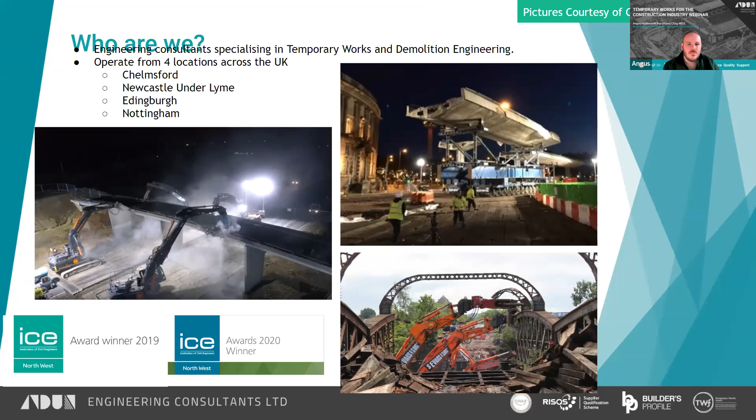So let's actually get into the presentation itself. So why are rail temporary works different? What's so special about them? Well, the answer to that is, if you get things wrong, not only do you affect your construction site, but you have the very real opportunity to kill or injure a lot of people who happen to be going about their daily life using public transport, in this case, the railways.

So as far as I'm aware, I don't think there's ever been a temporary works failure that has actually caused a train carrying passengers to derail that has led to injury or serious injury or death, though there's been a couple of close calls over the years. Going back, I don't know, when Gerrards Cross was probably early 2000s. I can't remember.

They wanted to build a new Tesco store above the railway just outside Gerrards Cross station. And they did it out of precast segments, which you can see here. So that's one segment. Hopefully you can see. Can you see my mouse moving right? Or do I need to just draw on the screen?

It was 2005, Angus. 2005, there you go. So there's one segment that way, the other one that way. So they sat on foundations over here and here. And then they were dropped into place. And then there was supposed to be a very careful backfill methodology used to ensure that there was a balanced load on either side of the arch.

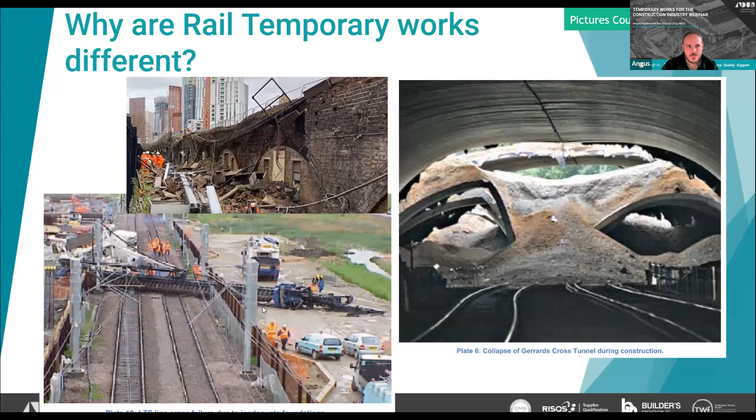So the other aspect to consider with the railway is quite a lot of our rail network is electrified, and there's plans for quite a lot more of the rail network to be electrified. You have two key types. You have your OLE, overhead line equipment there, which the conductor picks up off. Obviously that's running at high voltage, so you've got quite large interface zones you need to be aware of and stay well outside. So the key one being the 2.7 exclusion zone around the conductor itself.

Then you have your EMC interference and compatibility zones. That's more of interest when it comes to building near it or putting a house near it or some sort of development nearby. You need to make sure you're outside the EMC zone.

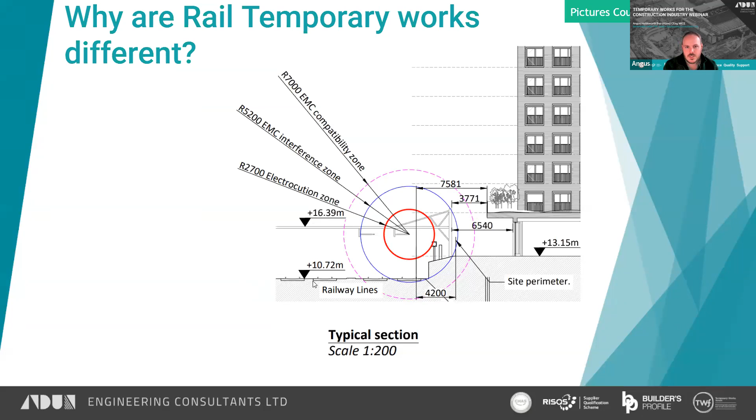Down in generally the south of the country, south of London, we also have the lines that are third rail electrified. That's literally just a rail that sits here, or it could be this side actually, it can be either side of the track, and the trains have a shoe on them that picks up current from there. Now, probably not quite such an issue to work around because it's quite well understood where that is, but the OLE is a much higher hazard for the sort of works we're doing, I would suggest, than the third rail. Unless, of course, you're working on the track, in which case you've got to protect the conductors.

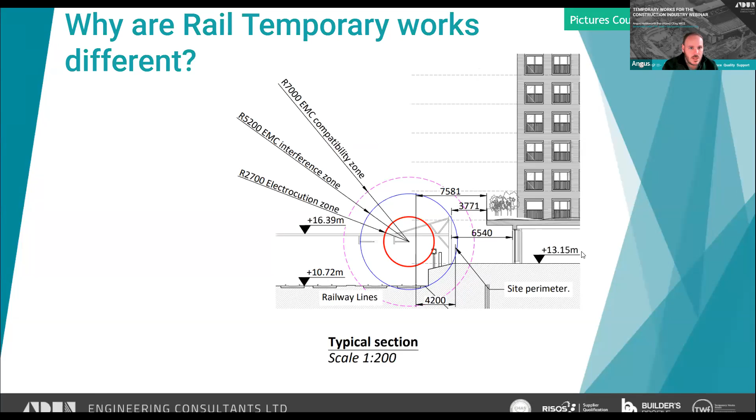So Network Rail defines what they mean by temporary works. There's lots of different definitions in the industry of temporary works, but this is what Network Rail use. An engineered solution that is used to support or protect either an existing structure or the permanent works during construction, or to support an item of plant or equipment or the vertical sides or side slopes of an excavation during construction operations on site, or to provide access.

It is used to control stability, strength, deflection, fatigue, geotechnical effect, and hydraulic effects within defined limits. They then go on to talk about a number of specific items, but I'm not going to read all of that out. You're quite welcome to read it or get yourself Civ 003 and read it yourself.

So one big change within the industry since the last time I did this presentation is that Network Rail have now made their standards freely accessible to people who need them. So if you search for Network Rail standards, it will take you to a Network Rail page, which will tell you how to gain access to the standards. Effectively, you register, they check your credentials that you are actually working on the railway or you need access to these standards. And if so, you get access and you get all of your standards for free, which to my mind makes an awful lot of sense.

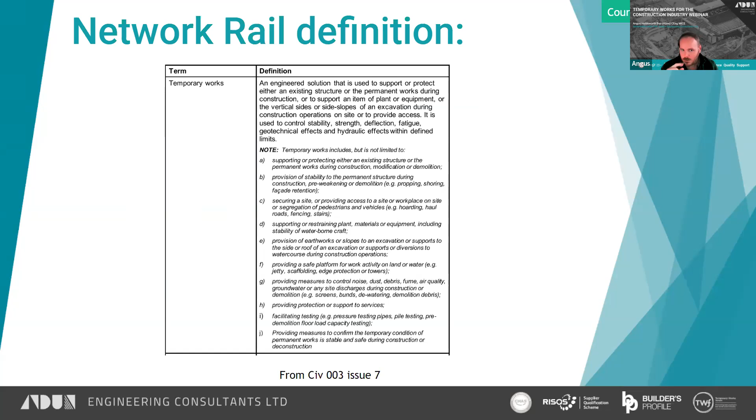These Network Rail documents, it made no sense to me that we had to pay to access them to do work for Network Rail infrastructure. It makes far more sense that they're free issued and we don't just add on the charge of accessing the standards to Network Rail every year. So it makes perfect sense to me to do it this way. And it means there's no excuse. If you need the latest standard, you can go and look for the latest standard, access it yourself, and away you go. So anybody here who's working in the rail environment wants to go and read where this all comes from, there you go, Civ 003 issue 7 is the latest version.

So within Civ 003, there is a process flow which clearly explains temporary works, well, permanent and temporary works actually, but we're talking today about temporary works. They've changed from the GRIP stages at the top, though GRIP stage is still broadly aligned with these. I'll show what GRIP means in a minute, but it used to be tied back to the GRIP stages of the projects, but they've changed. I think they're now using, is it PACE system? I can't remember off the top of my head.

So right from the very start, temporary works should be considered. It's quite clear here. So at the very, very earliest stage where you're working out, right, we want to replace this bridge, or we want to build this new platform, whatever the project might be, you're supposed to start considering temporary works. In fact, the permanent works designer has to specifically cover their conceptual idea for construction and temporary works within the Form A, which is the approval in principle process.

So it should be being considered right from the front of the project, which is excellent, as long as they get the right people involved at an early stage to consider the temporary works and to actually plan how best to deliver them. I've whinged about this many times before, but if you get people in who know temporary works, then you get a better output at the end than if you get a permanent works engineer to come up with the temporary works.

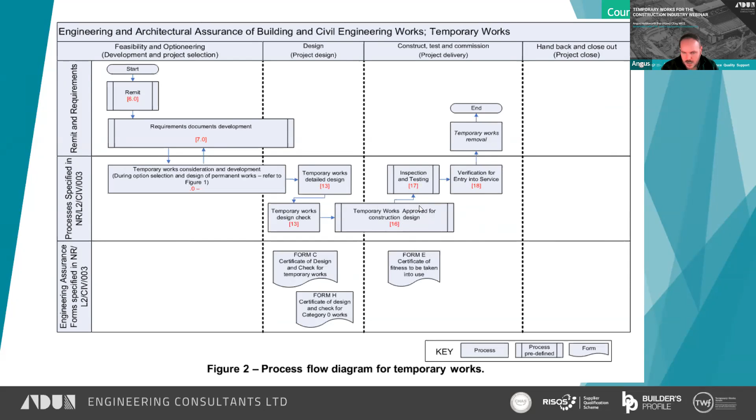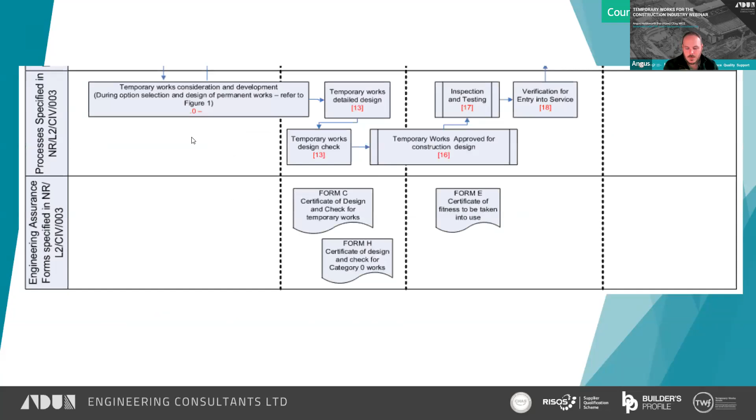Certificate of fitness to be taken into use, which will have to be filled in, but that's a construction stage thing rather than a design stage output. So just going into a bit more detail there, which I've talked through in the other slide. So the GRIP stage is what we used to be using, which was output definition, feasibility, option selection, single option development, detailed design, construction, test and commission. These GRIP stages still kind of go hand in hand with these stages here. It's just they've tweaked the naming of them, but the GRIP stages are still referred to within Civ 003.

Last time we did this presentation, we would have been talking about Form 1 to 6. They no longer exist. So we're now going back to Form A to H. Form A being the first form that's put in, which is the approval in principle, explaining what the project is and how it's going to be done, the design standards you're going to use. Every project for Network Rail will have a Form A because it sets down what the project is and how it's going to be designed and delivered. And as I said, temporary works should specifically be mentioned within it.

Form B is the certificate of design and check for permanent works. Form C, certificate of design and check for temporary works of category 2 and above. Form D, I'm not really sure, I've never been involved with one. Form E is bringing something into use. Form F, Roads Highways Authority, again, I've not really got much experience of that. And then Form G is for Cat 1 work, and Form H is Cat 0 temporary works. So these have all been simplified, and whereas before for a temporary works design you've had a Form 2 and a Form 3, it's now all in one document, which is your Form C, which is only a good thing in my mind.

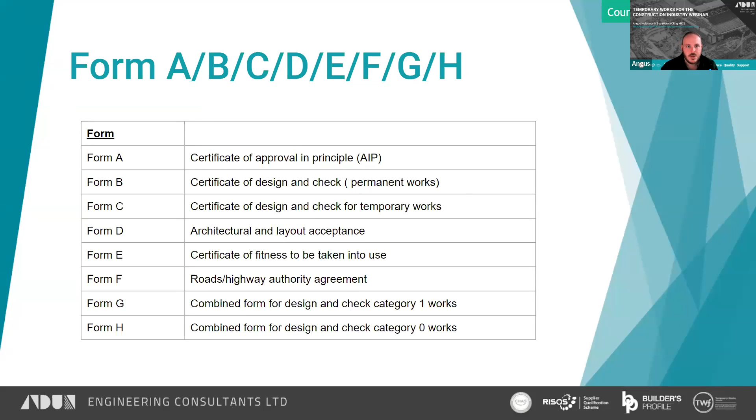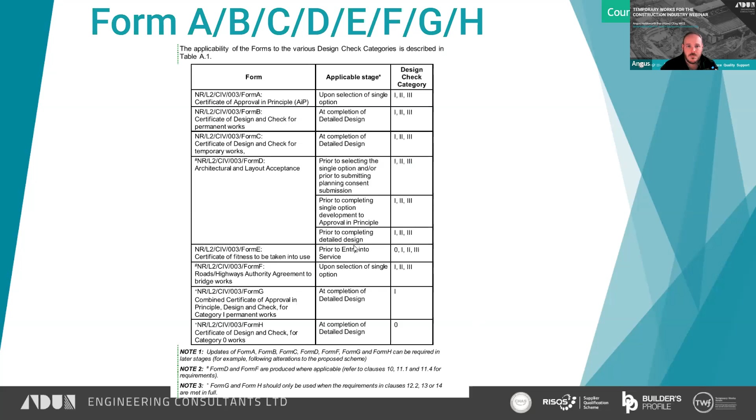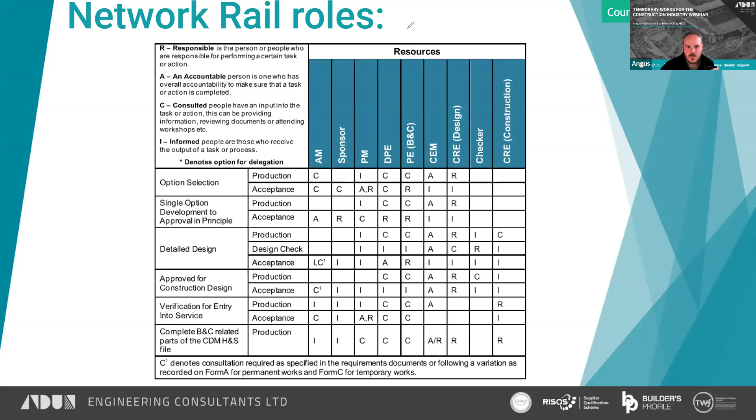And then this is just, again, the Network Rail definition of each of those, showing the design check categories that are covered, which is basically what I've just talked through there. Again, straight out of Civ 003. So within Civ 003, there's a number of what they call resources. There's people involved, and it clearly sets out who is responsible, accountable, consulted and informed at each stage of the process. So this is for detailed design, which is where we're most going to be looking, which is where you're going to be having your temporary works design.

The key people being your CEM, your CRE, the checker, and the project engineer now actually as well. So CEM is contractor's engineering manager. They are the ultimate overseeing person for the scheme. A lot of responsibility being a CEM, often engineering manager type level. They are accountable for most engineering outputs on the scheme.

The DPE is a Network Rail role, designated project engineer. So the CEM is normally for the contracting organisation, generally speaking, and looks after all the deliverables and is responsible for making sure that everything is properly coordinated. So making sure the IDCs are undertaken, which is your interdisciplinary checks.

CREs, there'll normally be a CRE design for each, what's the word, I can't think of the word I want. Each discipline. So you'll probably have one for the OLE, one for temporary works, one for geotechnical, one for permanent works. It all depends on the complexity of the project. You can even have them for demolition. It all depends on how the CEM and the project team want to set it up. But the CRE design is responsible for making sure that the detailed design is completed.

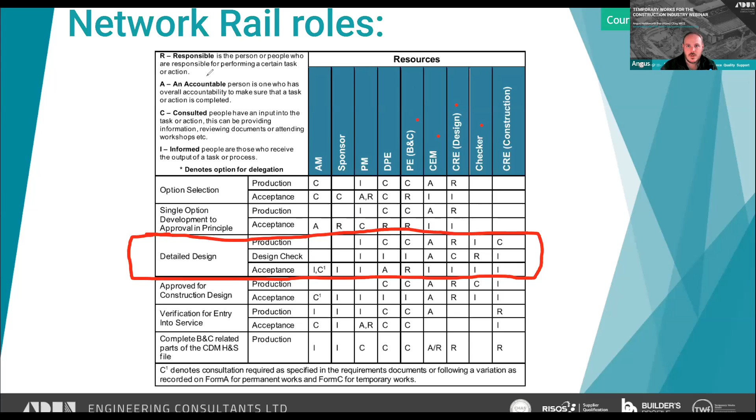The checker is obviously responsible for making sure the design check is undertaken. CEM is accountable. They make sure the action is completed, so they've got to make sure it's done. The CRE is responsible for performing that task. Okay, and then the project engineer has to accept, i.e. is responsible for accepting that task. I don't know if you can see that, just clear those sketches. So at the top there, the R, the A, the C, and the I, and what that means. And then the DPE is consulted and, for acceptance, is accountable as well.

All very clearly set out. So you should be under no illusions as to what your role entails. And each of these roles is set down within the Network Rail documentation. I can't remember off the top of my head, I meant to drop in here the correct standard that refers to defining each of these roles. Suffice to say that it has also become a much more in-depth process than it used to be to get approved as a CEM or a CRE or a checker. You have to do a lot more work now to demonstrate that you are competent and that you can undertake that role. It's quite an in-depth process now.

A lot more so than when I was talking about this 2 years ago, and it was really just fill in your FO39 or 40, send your CV. Now you've got to do that and your quals and all the other bits and pieces to demonstrate your competence and how you've actually achieved the criteria set down for each of those roles.

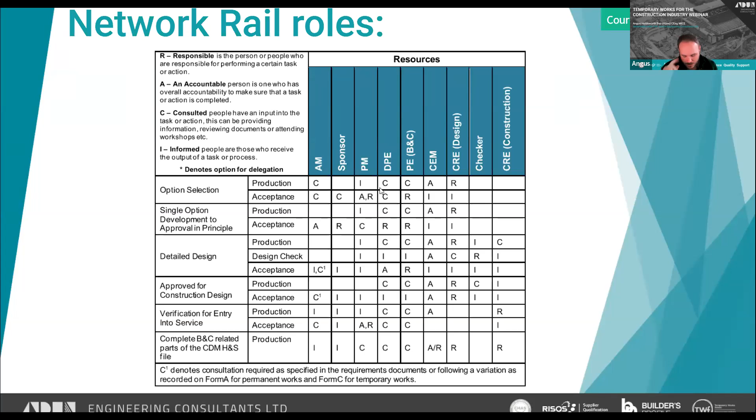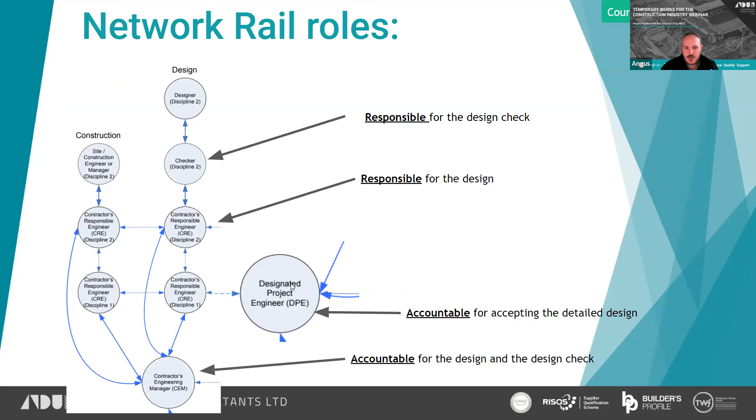So to put that another way to make this a little bit easier to follow, I found it easier to look at it in a flowchart kind of role. So this is how that sits. So for the design, you've got a designer and your checker, and then the CRE is responsible for making sure that this overall design is correct. The DPE is accountable for accepting it, and the CEM is accountable for the design and the design check. I think I've missed one off there, haven't I? Because I haven't got the project engineer on there. I need to revisit that. Let's skip that one.

Another key item which is now being made a defined requirement is the interdisciplinary check. So that means if you design a piece of temporary works, you've got to do your IDC, which is where all the other disciplines are brought together. You run through the scheme and make sure that your design hasn't or isn't going to affect another discipline's design. So that could be OLE, signal sighting, the gauging team, security, or interface with the public in some way.

But the idea being that you get everybody in the room, or more likely via Teams or similar, to go through a scheme, and you formally record the output of that assessment. That could include effectively a DRN, a design review notice, which identifies any changes that need to be made. Those changes are then made before the scheme is finalised. But that is now a defined requirement within the Form C and the Form B to make sure that that is done, whereas before it wasn't so bluntly put, it wasn't a requirement, where it's now specifically required on the form.

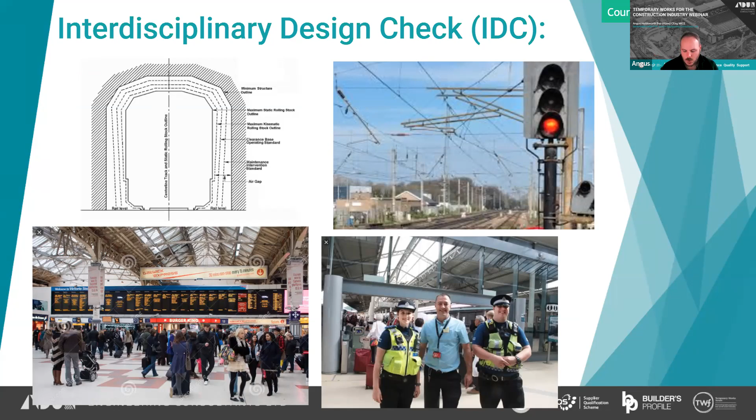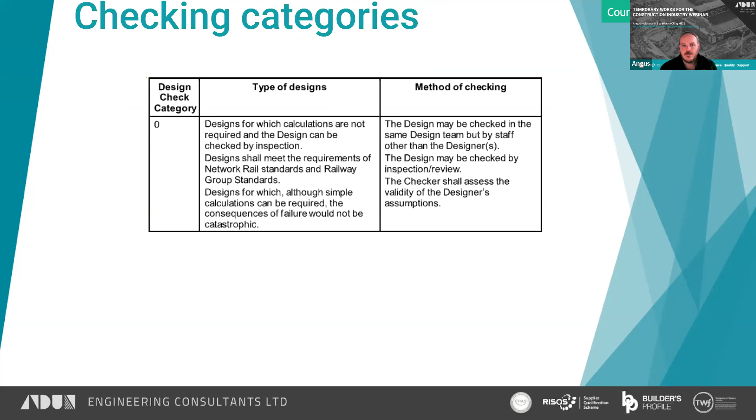So checking categories. If you've watched these webinars before, we've covered these many times. There's Cat 0 to Cat 3, starting with 0, which is the most basic design and check package. It's normally for something very, very low hazard. So something like an excavation 1.2 meters deep. Cat 1, slightly more in depth.

Cat 2 is where you take another step up in complexity. I'm going to show examples of this shortly, so I'm not going to go into too much detail here. The key change with Cat 2 compared to Cat 0 and Cat 1 is that the person checking the design doesn't get to see the original design calcs, and it can't be someone in the same team. So it can be the same organization, but not within the same team.

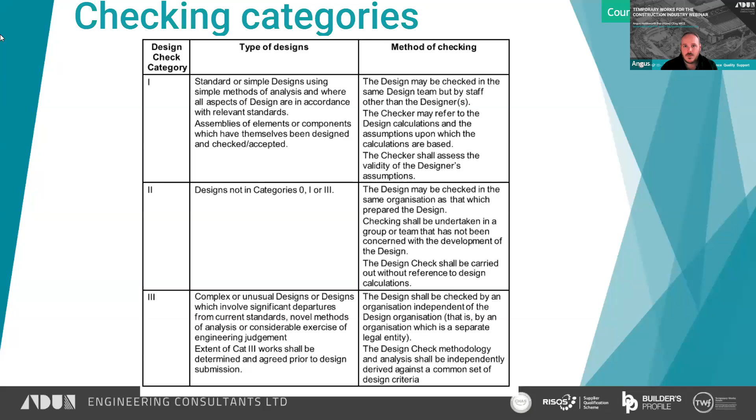So as a business, we do it by having a different office undertake the Cat 2 to the one that's done the design. But it's whatever system you put in place to show that a Cat 2 check is being undertaken properly. The key thing is this point here, which I've said a number of times: the number of companies I know that still consider that a Cat 2 can be done by looking at the calculations is unbelievable. It says there in black and white, it says in BS 5975 in black and white, you can't look at the calculations. It's as simple as that.

Similarly, Cat 3, similar idea, except it goes to another organization. The definition Network Rail uses is a separate legal entity, which, as I understand it, means an entirely separate business, not a part of the business. So if you run with one set of PI cover and you have 3 different businesses with similar or slightly different names, that is not a separate legal entity because it goes back to the original PI cover. If, however, it's a business and a second business that's completely standalone, with separate PI cover, that is what they mean by separate legal entity.

The other point with the Cat 3 is the design check methodology and analysis shall be independently derived against the common set of design criteria. So that means that if I was doing a design, I would provide the checker with my design output, being the drawings, and my design methodology. The checker then has to go away and work out their own methodology. And again, Network Rail would prefer that different software is used, a completely different approach is used, to demonstrate from a separate engineer's point of view that the design works.

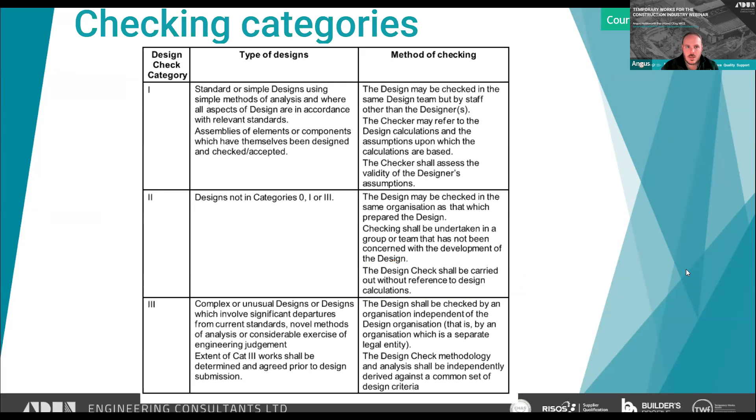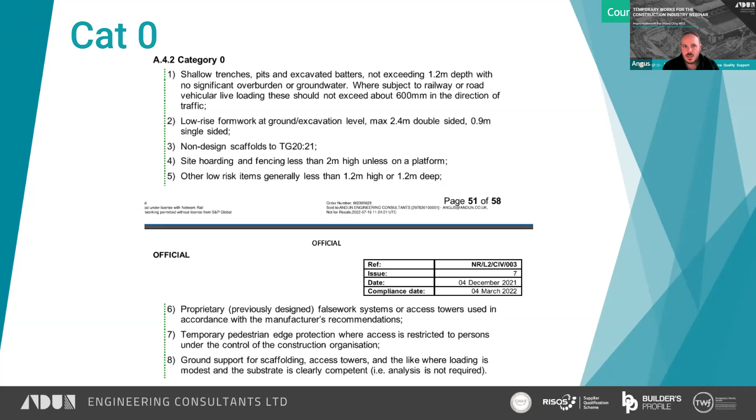So if we run through some examples now, Cat 0 being the lowest grade. So you've got hoardings that aren't used on the railway, scaffolds to TG20, which means a standard scaffold effectively, ground support for scaffolding or access towers, shallow trenches not exceeding 1.2 meters deep, these sorts of things. So fairly simple run-of-the-mill items. An example there, less than 1.2 meters deep. I mean, that trench box is more than 1.2, but I couldn't find an image of a trench box 1.2 meters deep, to be honest.

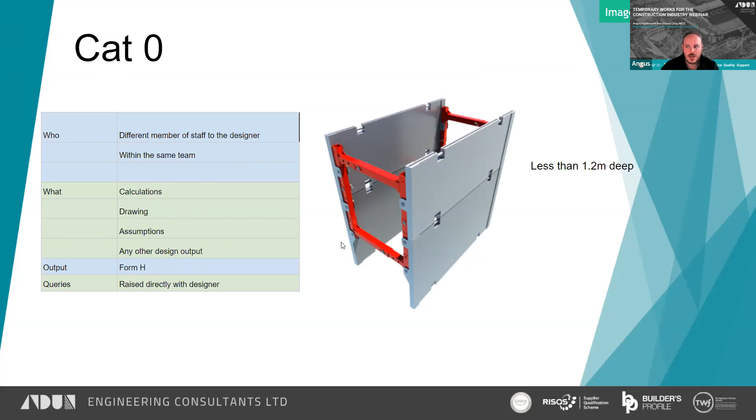So who can do it? A different member of staff to the designer within the same team, and they can look at the calcs, drawings, and any other design output, no problem at all. And the output for Network Rail would be Form H along with the drawings, and they probably want the calc package. If you've got any queries, you can just bring them straight up with the designer. Simple as that. Oh yeah, the trench boxes are available.

Cat 1. Simple excavations using CIRIA 97 trenching practice. Design scaffold to TG20. I'm just pulling out some individual items here. Hoardings greater than 2 meters high, concrete pump outriggers. Hoardings on a platform below 2 meters high. Generally, rail hoardings are 1.8 and on a platform, so that makes sense to me. A Cat 1 check there.

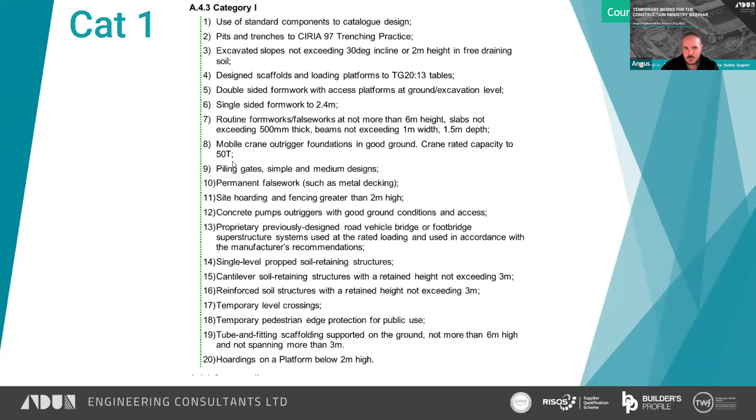Mobile crane outrigger foundations in good ground, cranes rated less than 50 ton. So an example here would be a mobile crane positioned which is less than a 50 ton mobile crane, so an outrigger load around 25 tons. I'm not going to read all of these out, but again, the output is a Form G for a Cat 1 check or a Cat 1 risk category. And the checker can look at the calculations, the drawings, and go through and make sure that they're happy with the approach.

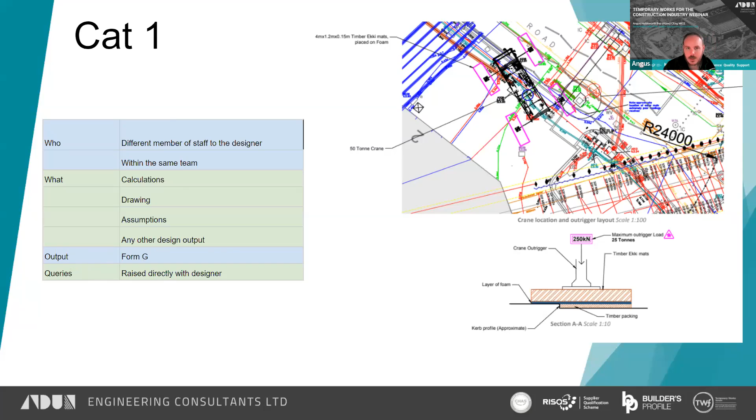Hoardings, again, this is an interesting one because I've never ever been able to put a hoarding up on a platform that has been Cat 1 checked. They've always had to be a minimum of Cat 2 and in some cases Cat 3, but the standard now says Cat 1, though it is at the discretion of the DPE, which is what CIV 003 says. But interesting that this is now classed as a Cat 1 design.

Cat 2, where we start getting into the slightly more complex: excavation frames, cofferdams, sheet piled walls, contiguous piled temporary walls, design lifting equipment, barge mounted equipment, tower crane bases unless of complex design. I'm not sure what would define complex design, whether that means a piled base becomes a Cat 3 or whether they mean a grillage. I'm not sure what is defined there.

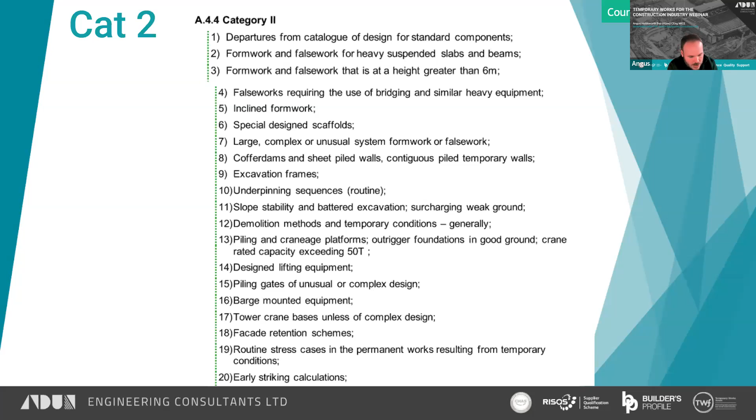Routine stress cases in the permanent works resulting from temporary conditions come under Cat 2, which is interesting as well. Again, I've never got away with a Cat 2 check where we've changed the loading on a permanent work structure. Conventional tower crane base gets a mention again there, which is interesting. Reinforced soil structures not exceeding 6 meters high. Temporary platforms at Cat 2. Road vehicle bridges and footbridges.

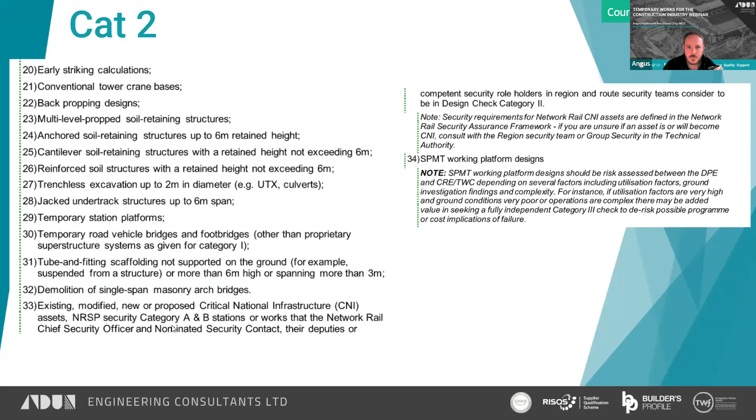Demolition of a single span masonry arch bridge falls under Cat 2 as well. So as an example there, that would fall under a Cat 2 check. Though again, there's many occasions where we've had to do Cat 3 checks of masonry arch bridges. Again, it's down to the DPE to decide. If they decide it warrants a higher level of check, then they're within their rights to ask for a higher level of check. Cat 2, the output is a Form C, a design check statement, and a DRN notice.

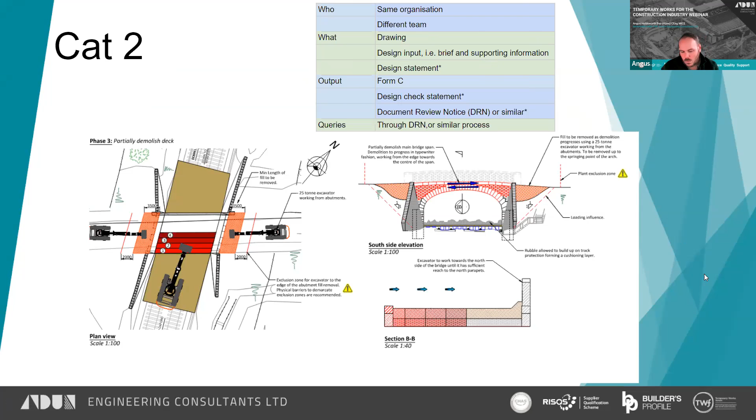So if the Cat 2 checker identifies any issues, they should be flagging those up formally to the designer to make sure that they're tracked and adjusted or addressed before the design is finalized. And again, the checker cannot look at the calculations. There's no possible way that a Cat 2 or Cat 3 checker should be seeing the calculations. It just shouldn't be happening anymore.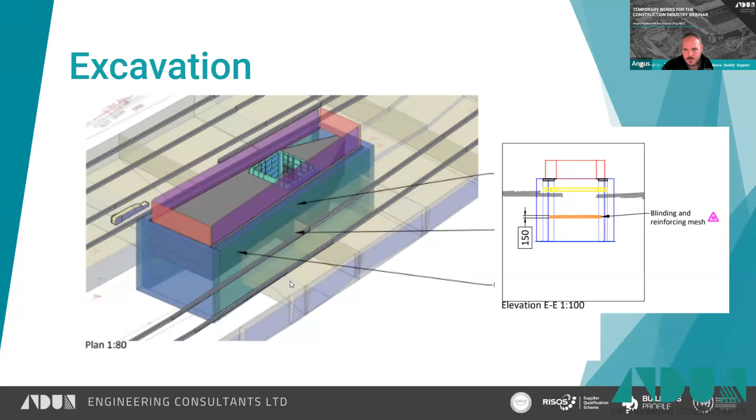So that's something you really need to consider, particularly when you're doing temporary works in close proximity to the railway. The gauging envelope is a very important thing. There are ways and means that you can get the gauge envelope reduced, but it's quite a specialist and drawn out process to actually have it gauged for the stock that uses the line. This is the general gauge profile that is used for clearances across the network. But there are certain areas where they have a reduced gauge anyway, but it's not a simple process. It's not one we've ever gone down. It's easier if you stay outside this gauge envelope and then everyone's happy.

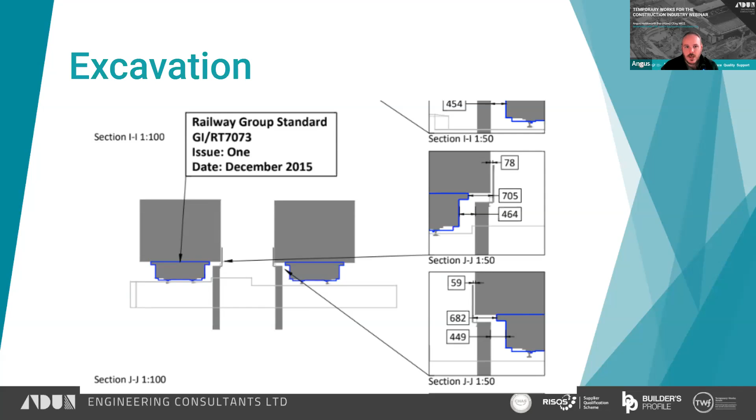Cat 3, so the highest hazard or the most complex temporary works you can have, where we get to things like excavations and cofferdams in tidal conditions, demolition of non-masonry bridges. So any non-masonry bridge has to have a Cat 3 check. Demolition of multi-span masonry arch bridges. Again, that all comes back to a few collapses that have occurred with multi-span masonry arch bridges over the years. Partial demolition or modification of existing structures.

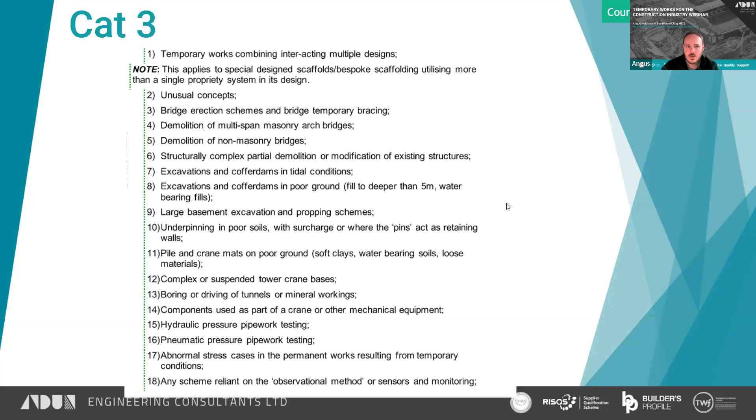Complex or suspended tower crane bases, abnormal stress cases in the permanent works resulting from temporary conditions, any scheme where you're using the observational method or sensors and monitoring to make sure that it's performing as required. Pile mats and crane mats on poor ground, so that means soft clays, water-bearing soils, loose materials, etc. So there's quite an in-depth description of the things that are covered here. Abnormal and highly innovative designs, work on sensitive clays, facade retentions, schemes close to public areas.

And then there's this kind of catch-all of structures that exceed the limits for design check category 2. Any design check category 2 item in an unusual or high-risk situation, innovative or complex designs, projects involving partial demolition, other works that the technical head, AM, or project engineer and the DPE in many cases consider to be in check category 3. So regardless of how you've categorized it, don't be surprised if Network Rail come back and say, hang on a minute, actually we want you to go to a Cat 3 here. It's not unusual at all to be pushed up the ladder.

So these categories and the Form C, G and H process applies to when you're working for Network Rail as the ultimate client, but also where you're doing asset protection jobs. So if you're working on a scheme next to the railway, where the end client isn't necessarily Network Rail, you're probably going to have a BAPA in place, which is a basic asset protection agreement. This sequence and all this methodology still applies to those situations. And you will be held to follow these systems.

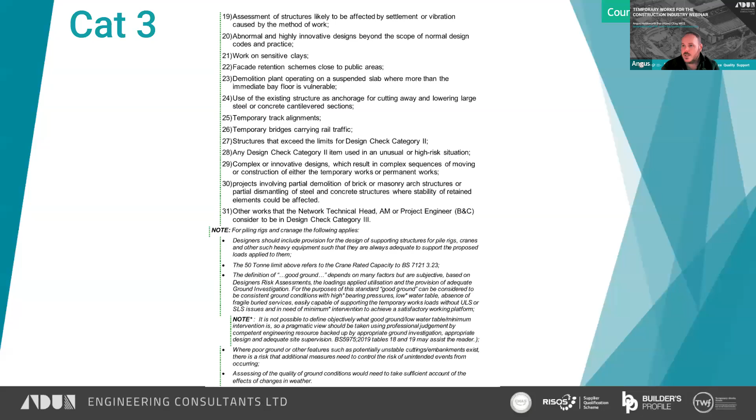So a good example of a Cat 3 would be SAS 13 here. Masonry, multi-span masonry arch bridge being taken down. This again, the output is a Form C design check statement and a DRN notice from the checker to the designer.

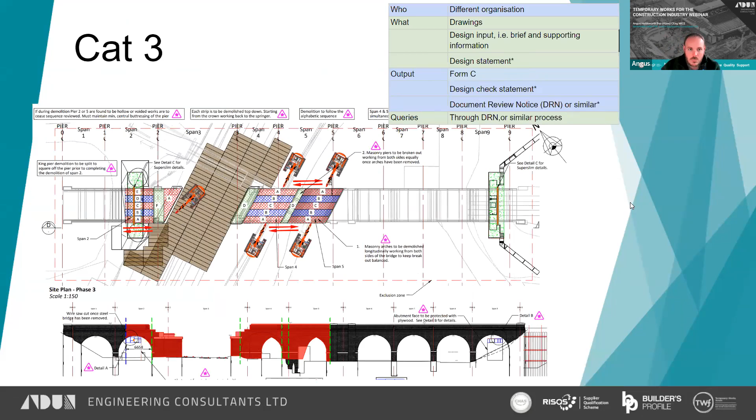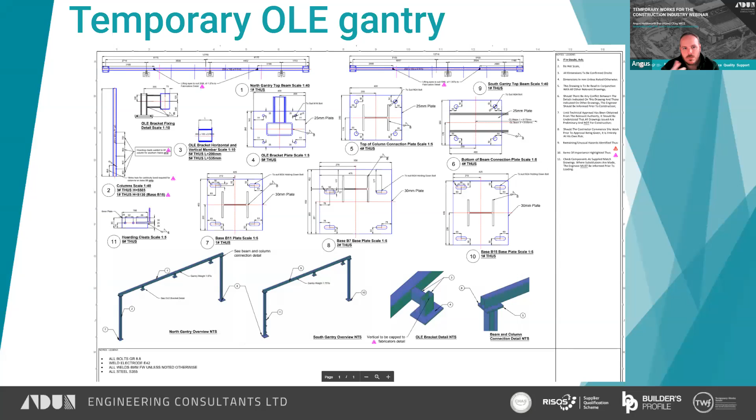This is a good example of a Cat 3 as well. I can't remember the exact reason as to why we ended up doing this, but we designed a temporary OLE gantry for Manor Park Station. I think it might have been because they couldn't get hold of stock components. So we designed a temporary OLE gantry, which was installed. And there it is in all its glory. In fact, it's sitting on the lift base that you can see there. That was what the excavation was for back on the earlier slides.

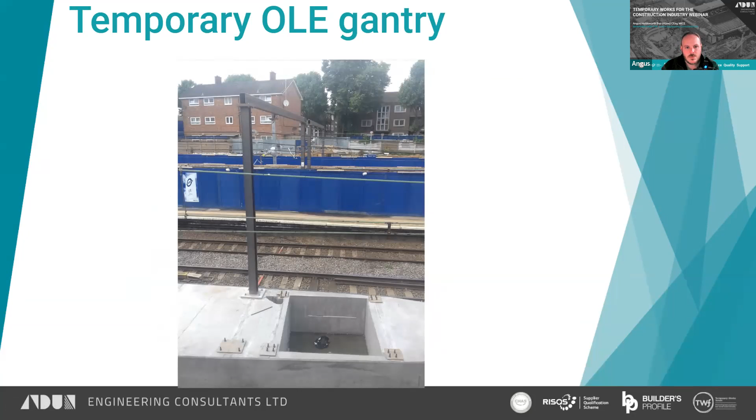So then there's a temporary OLE gantry in place that picked up the OLE. So that was quite an interesting design experience. Not one we've done since, but interesting nonetheless. It only had to last a couple of weeks, I think it was, before the new permanent solution went in place, but it was an interesting one.

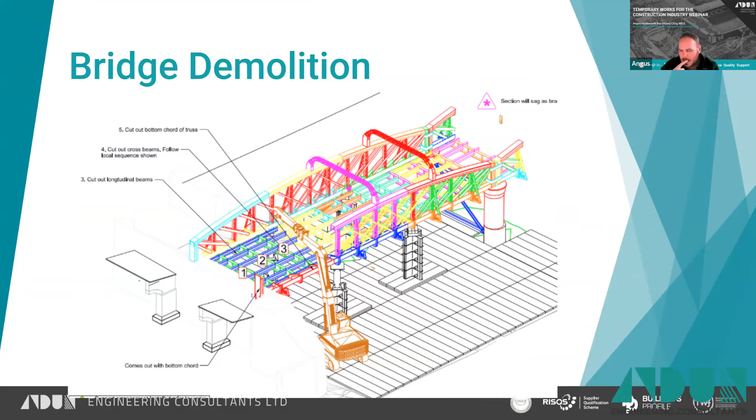So bridge demolition is one that is now fully covered in there. This is an example of where we delivered a demolition scheme within a ProjectWise environment, all in full 3D. Everything, every part of it was done in 3D in the ProjectWise environment. Quite hard work and quite a lot of time to get it done, but done it was. The different colors represent the different components of when they come out. Again, we had to get agreement for using the colors in the drawing, but it made it a lot clearer when you were following the demolition sequence to understand what came out when.

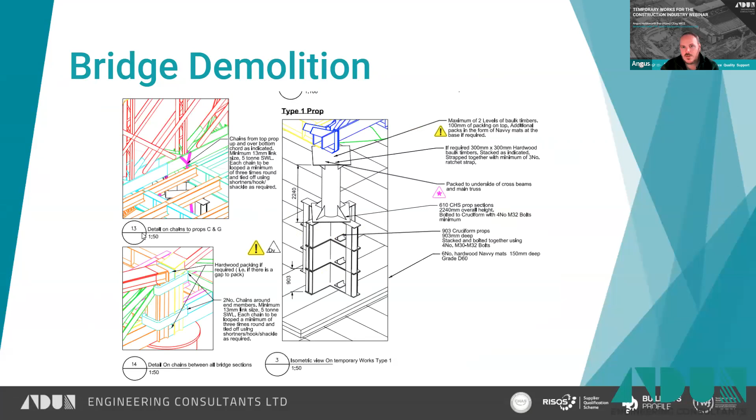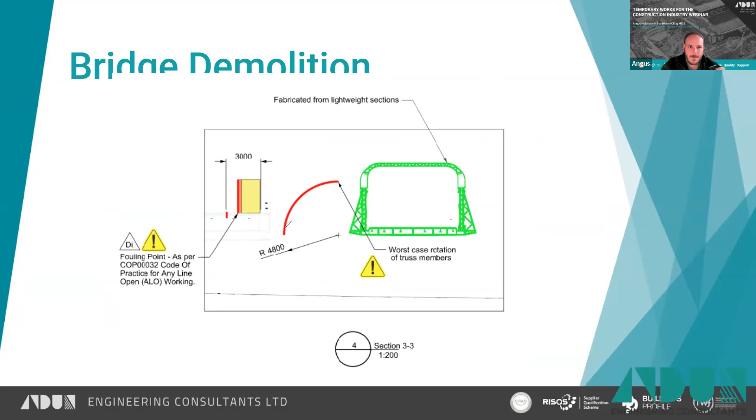It's just an example from those drawings showing the propping that was designed and the detail of how we secured the structure and made it safe while the demolition was undertaken. Quite an interesting project. You've probably seen the videos before if you've watched our webinars. Again, considering the adjacent railway, so this section of railway here remained live throughout the demolition works. So we had to take a lot of care with how we planned everything and consider the interface with the live railway throughout and demonstrate that we weren't going to affect it.

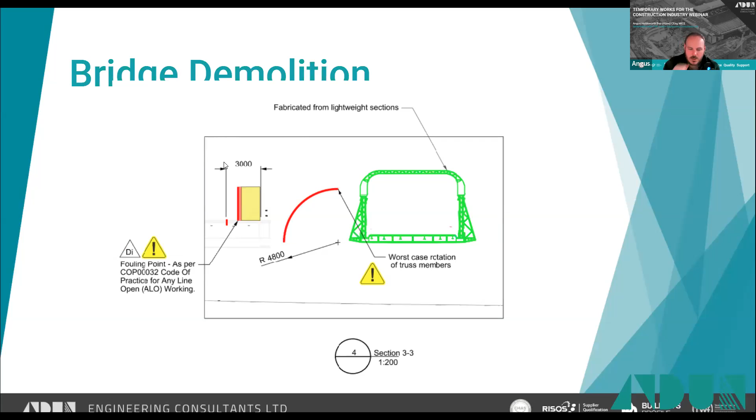There's more detail on the propping arrangement there. Another example here of another scheme with a 500-ton crane. So just looking at this drawing, the number of temporary works items involved was the crane position, the loads applied to this retaining wall in the temporary case, the demolition of this walkway over here and lifting out this walkway, the track protection down here during the works.

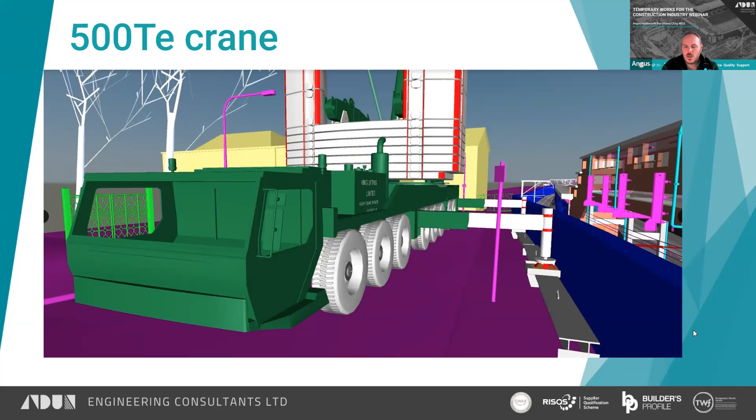There were lots and lots of items involved, and in fact the whole thing was Cat 3 checked. The whole project was Cat 3 checked as one. And this is just a little video I found this morning, actually, when I was looking for a good one.

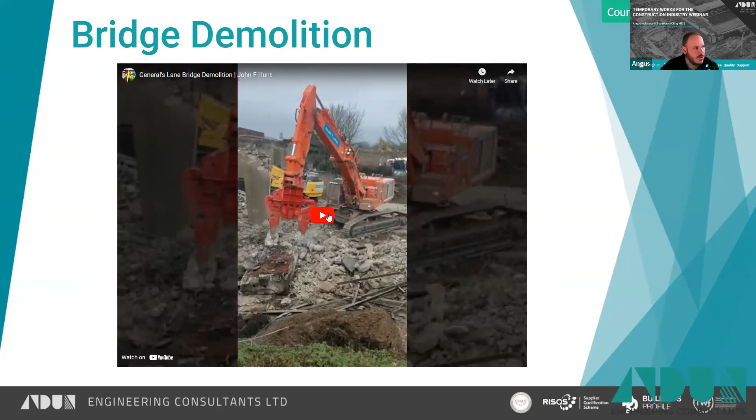This is a scheme we delivered over Christmas, last Christmas, with John F. Hunt. This is General's Lane, not footbridge, road bridge demolition. It's just a few little clips from the actual finishing off at the end of the shift. It was, I think, a 4-span pre-cast, pre-stressed bridge that was taken down last Christmas in a disruptive possession over, I don't know how many hours it was, 100 hours or something. And there's currently a new bridge going in across there now, which I think Graham's are doing.

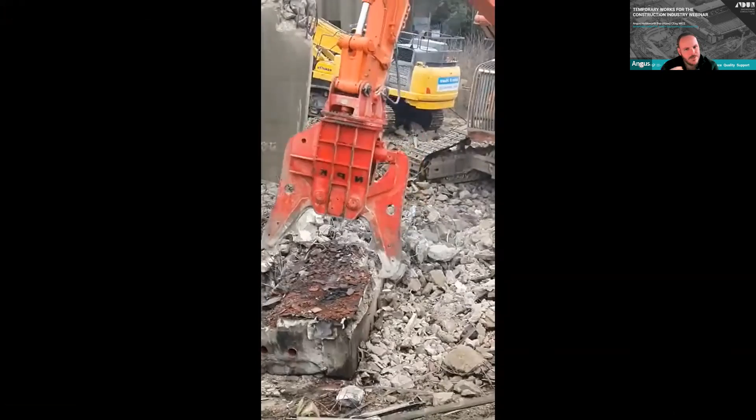That wasn't the video I thought it was. That's just showing a cracker. I've managed to insert the wrong video, but there you go. We'll leave it nonetheless. It's quite interesting to see a big cracker going straight through what is a substantial lump of concrete and making it into rubble very quickly. I think there's a better video available on YouTube, but that's one of them.

Oh, has that not gone full screen? There we go.

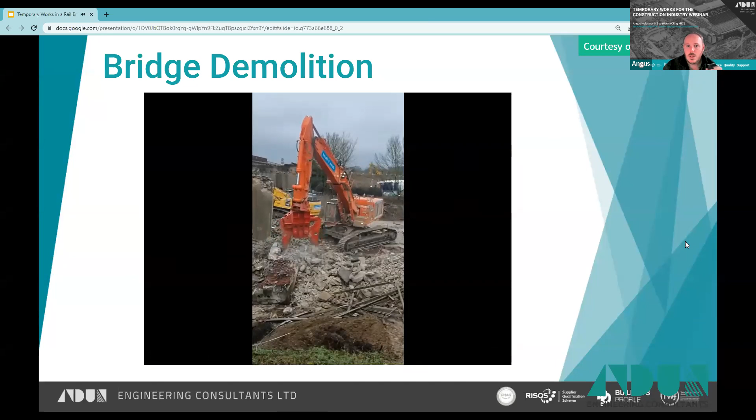So we've talked a few times in some of the descriptions up above of assessment of permanent structures in a temporary condition. We get involved in that quite a lot. So this is a good example of a scheme. This was at, not Manor Park, this was at Ilford. That's one. It's just outside Stratford. I can't think of the bloody name. Anyway, there was a temporary case where this existing retaining wall was going to be used in a temporary condition.

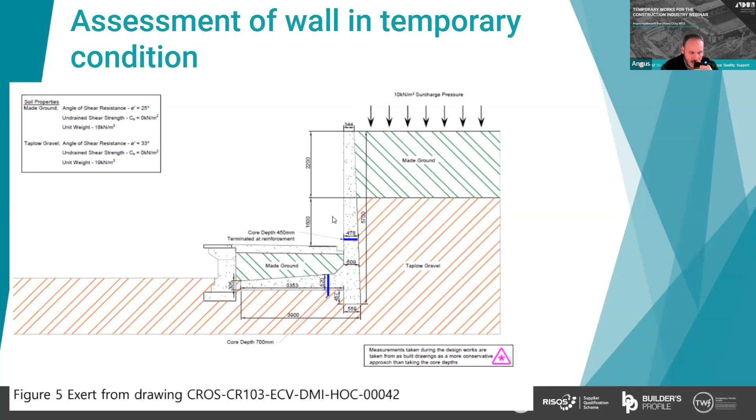We had to excavate out here. This had to be excavated, and then a series of piles had to be installed through here for a new lift to be installed. So we had to analyse the permanent structure in the temporary condition to demonstrate that it would work. Again, that was Cat 3 checked, because the potential for failure was quite significant.

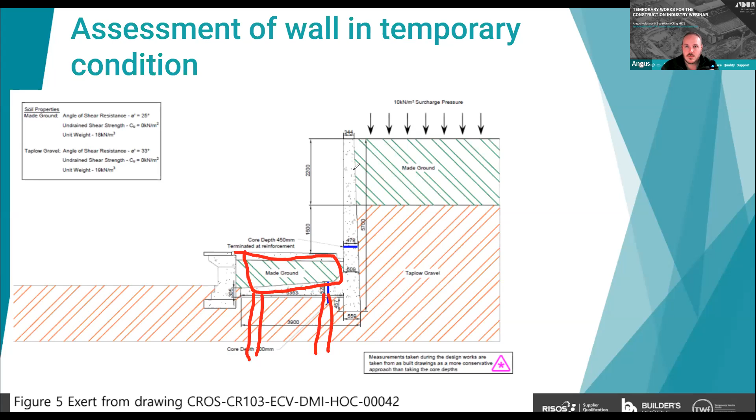And I've talked briefly about asset protection schemes. So that's where you're a private developer building next to a railway, and you've got an APA in place to deal with Network Rail to make sure they're happy with the works you're undertaking. So again, you've got to be considering all of the Network Rail assets. So that's not just the railway here, it's not just the lines here, it's not just the OLE gantry that sits here, which isn't shown on this drawing. It's also this retaining wall, which belongs to Network Rail.

So in this case, a ground movement assessment was undertaken to demonstrate that in the temporary condition, the retaining wall would not be affected, and also that in the permanent condition, the piles that have been installed back here would not affect Network Rail assets. The reason being the new definition of the track support zone comes out like this and then carries on at 45 degrees infinitely, is the way it's defined within the standard. So if anything you're doing enters that track support zone, you have to demonstrate to Network Rail's satisfaction that you are not going to affect the railway.

It's quite onerous, and in some cases it seems a bit over the top, particularly in circumstances where you're installing individual piles. This isn't a secant wall or similar. This is just individual piles, but that's the way the standard is written. If you're entering or affecting that track support zone in any way, you have to demonstrate that you're not going to impact the railway.

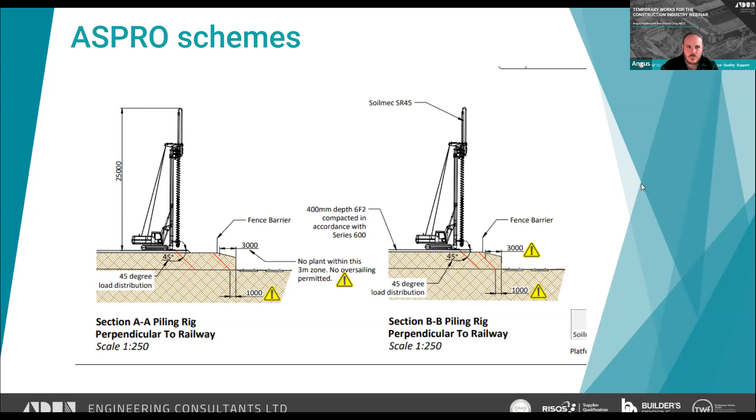So this is just a little case study of a rail job. Interestingly, although it was over the railway, this wasn't a job for Network Rail. It was an asset protection job. So we were working for TfL, who owned the road. Well, no, we were working for Hochtief, who were working for TfL, and they had an asset protection agreement in place that Network Rail would review everything and ensure they didn't affect the railway. So it was slightly harder than if you're working direct for Network Rail. Network Rail were just the technical authority, as it were, approving and overseeing everything.

So that actually shows it in the finished condition, with a new road bridge in place, the new service bridge in place, and the revised access to the station. But there were two bits of temporary works that really spring to mind. The first one being, if you look here, what you can't see is this area here and this area here, we had to build, in the end, we chose a king post wall solution around here to put these big chambers in at the back of the service bridge. So this bridge here was to divert the services from what was the old A1 like this. That then allowed this bridge here to be demolished and replaced.

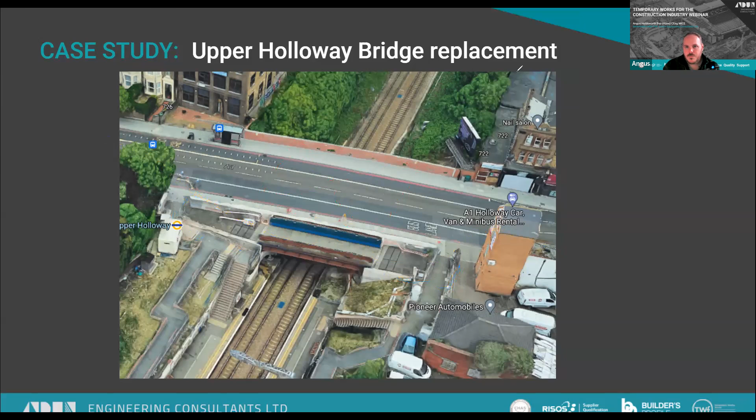You couldn't take this out until the services were diverted. Some of the services in here were BT fibre, and they needed quite big chambers and deep chambers to get from here in the road into here and up to here, which meant we had to put some big old excavations in here, which required a king post wall around here, went across there, and it went across there.

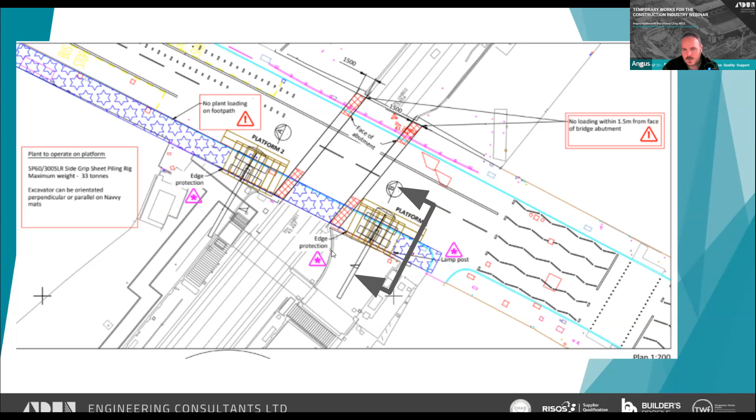Similar to that anyway. To do that, you needed to be able to get a piling rig in place. We chose a Movax rig, and we were asked to come up with a solution to allow the piling rig to operate up there. Now, if you think about it straight away, you've got a wing wall here from the bridge, and you're going to put quite a chunky excavator, I think it was a 33-ton excavator in the end, on here to operate the Movax to drive the king piles in, to then allow the sheeting to be installed, to allow the excavation to be undertaken.

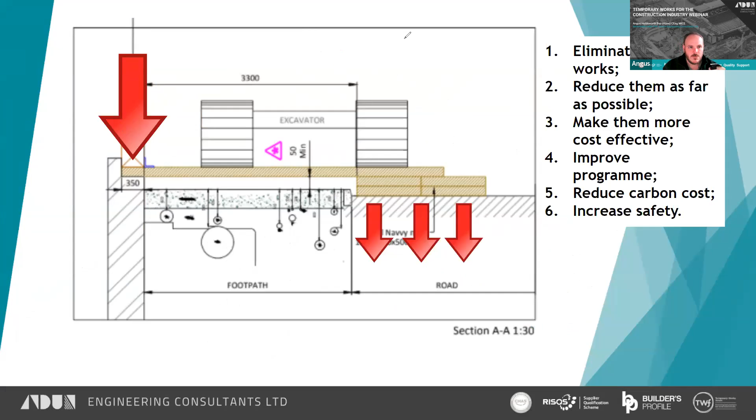So the original design that we were given to work from was that the designers had decided that the best thing to do was to put a big concrete slab in here to try and spread the load out. But there was no consideration of what that would do to this wing wall here, particularly as this wing wall was going to be excavated down in front of it. So we came up with a solution, which was to eliminate the temporary works as much as we could. So you could take out these concrete slabs, reduce it as far as we could, and make them more cost effective.

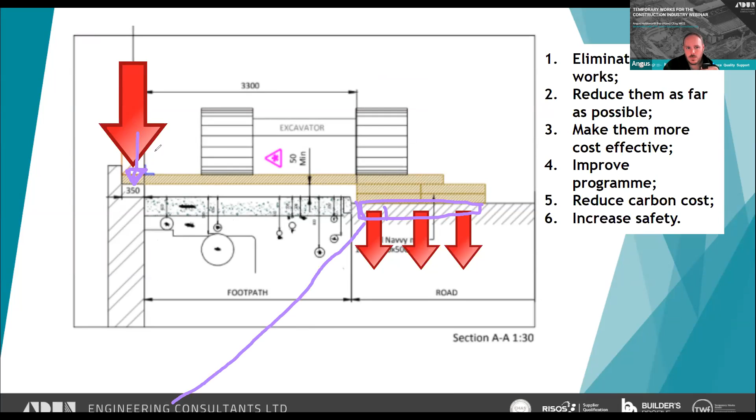So we said, right, if we put the Navy mat on top of the wall here, that is applying a stabilizing load to the structure. And then if we put the rear track back here, that load there is not really affecting that wall. It did a little bit, but not much. And that worked really well. No further temporary works were required to stabilize this wall or anything similar. It was as cost effective as it could be, improved the program and reduced the carbon cost of doing the works as well.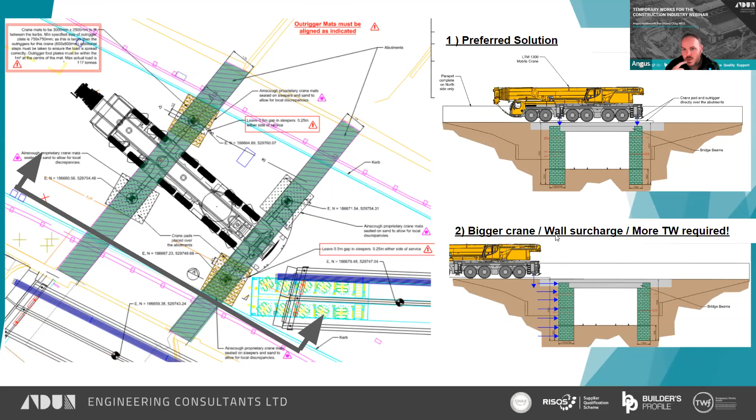We did an AIP for TFL to demonstrate that the abutments could deal with it. We weren't going to affect the bridge. And that gave a much better design output for our client. It's a smaller crane, quicker to rig, and it actually had more percentage capacity left than the 500-tonner would have done sitting up here, reaching to there. So again, reducing temporary works, cost a little bit more on the design side, but overall a better output for the client. And there it is in action.

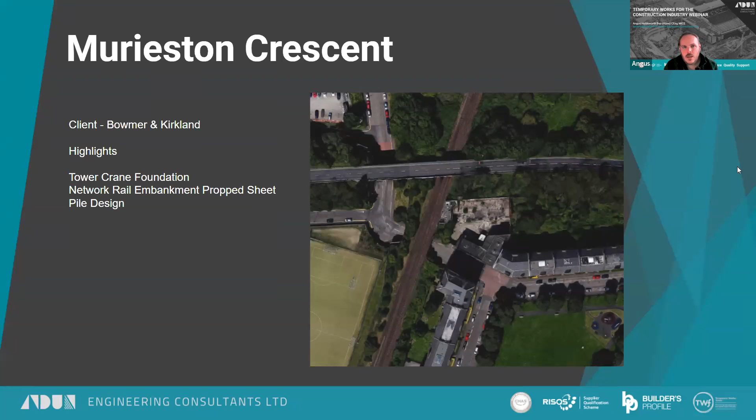This is the final little case study we've got on a rail interface. This was a project we did for Bowmer & Kirkland. Again, they had a BAPA in place to deal with Network Rail, and the site in question is here. In fact, it's there. Sorry, it's all that site there. And we were originally involved to provide Cat 3 checking service for a sheet piled wall and the tower crane base. And in the end, we ended up designing the earth retaining solution and the tower crane base.

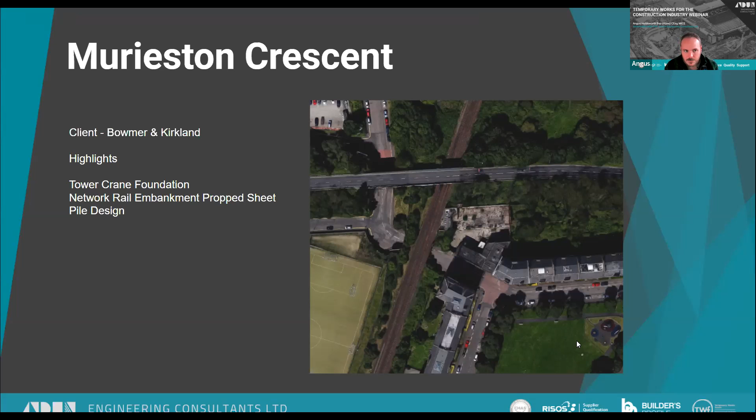I'll show you why we ended up the designer for the sheet pile wall shortly, and a tower crane. It had to be interfaced rather than a simple base. We had to interface it with the permanent works. And we ended up taking design responsibility and doing the full Network Rail submission and acting as CRED on the scheme for them in the end. So that's the site. You can see up here, you've got the railway line there sitting on top of an embankment and the OLE, and the final wall position is somewhere here, somewhere like that, that we need to achieve.

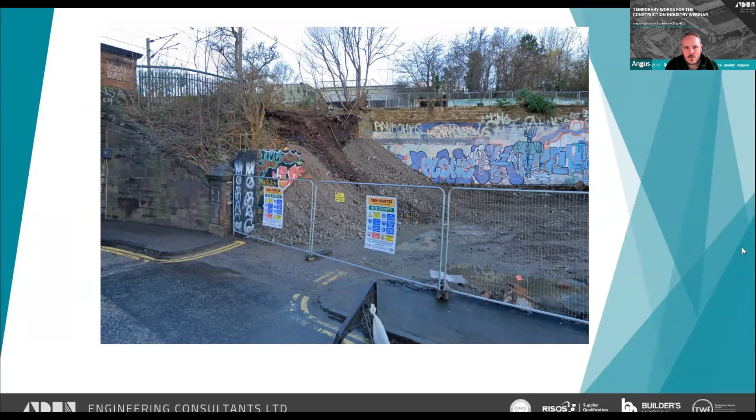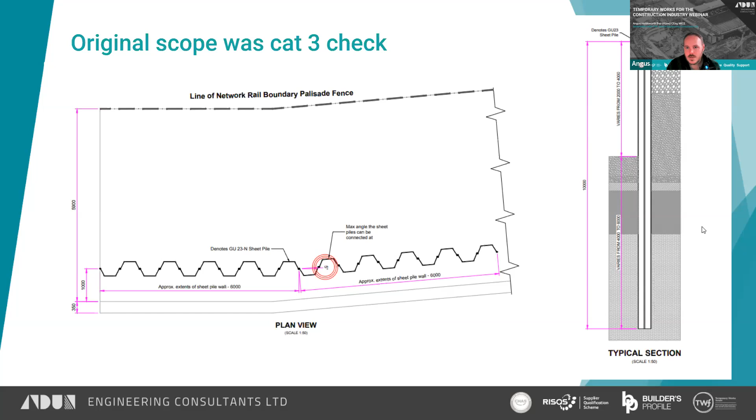So we received this as the design to check. So nothing that puts it in context on the site, really shows where the railway sits in relation to it. And they hadn't really considered the site constraints at all, or even the drivability and the constructability of their design. And when we did our check, we found they clearly hadn't allowed for the surcharge from the railway.

Deflections of over 65 mil at the top here, which would have led to deflections in the embankment, which would have led to movement in the track on the top, which are all things you want to try and avoid when you're doing a rail job. And sheets that are supposed to be driven into mudstone, into fairly stiff mudstone as well, which just wasn't feasible with the size of rig that they could get on the site.

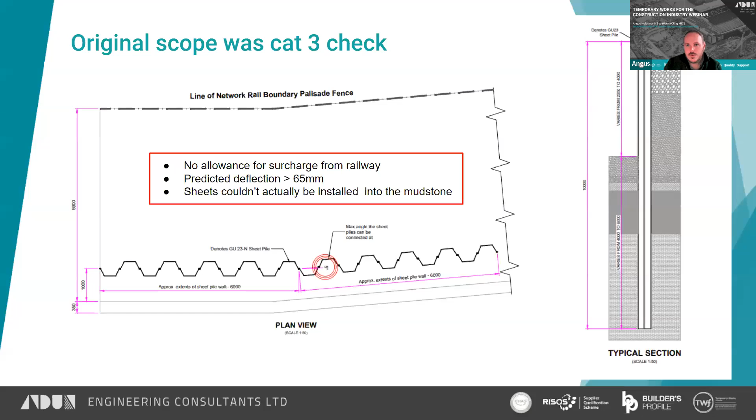So we found that the Cat 3 check failed, and Bowmer's asked us to redesign, come up with a solution that actually worked on the project. So you can see up here, this is the rail embankment there. So you've got your rail loadings to take into account. And again, you're affecting quite clearly the track support zone, which would end up something like this. That would be your track support zone somewhere there.

So you can see it's not a massive load really on the back of the sheet pile walls, but it still needs to be considered. And you need to demonstrate why it is that you're not affecting Network Rail's assets, and particularly make sure you're considering deflection of those sheet piles, because any deflection here is going to lead to settlement up here.

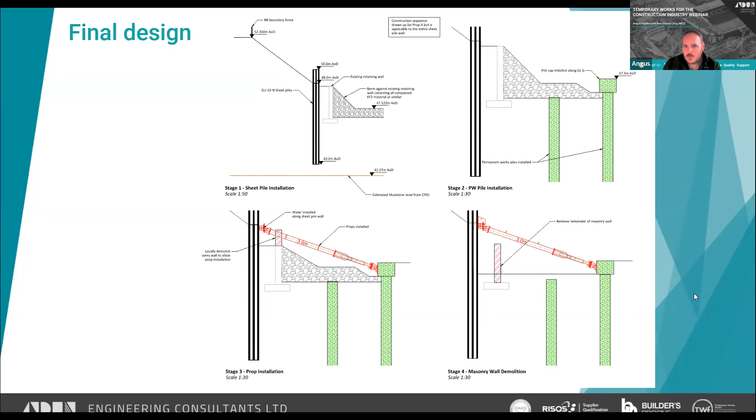So our whole process was designed around this concept of how do we install the piles. We can't put them into the mudstone because we know the rig can't drive them. So we had to be able to drive these sheets. They were only 7 meter sheets in the end, and then prop it whilst maintaining stability of the embankment. That propping then allowed you to take out the remaining permanent works. Then you could install the new permanent works. Then you could backfill between the permanent works and the wall, and away you go.

So you can see how the original design provided one part of the solution, but didn't consider how the whole scheme will be delivered. Part of the problem when you push the designs down and down the supply chain. So the person doing the design was working purely for the piling contractor. They wouldn't have thought that, given the fact they ignored the fact you couldn't drive in the mudstone.

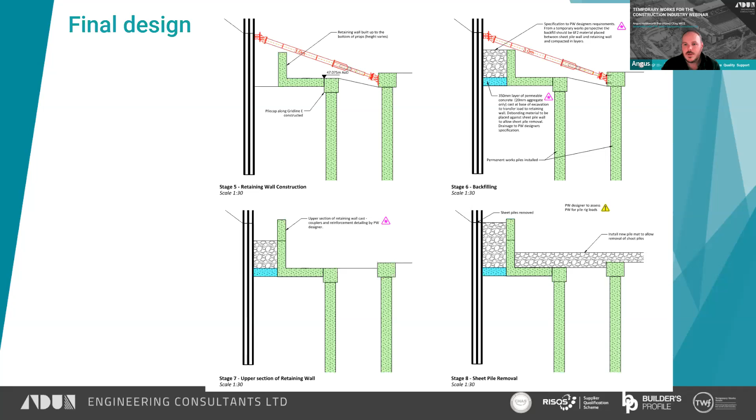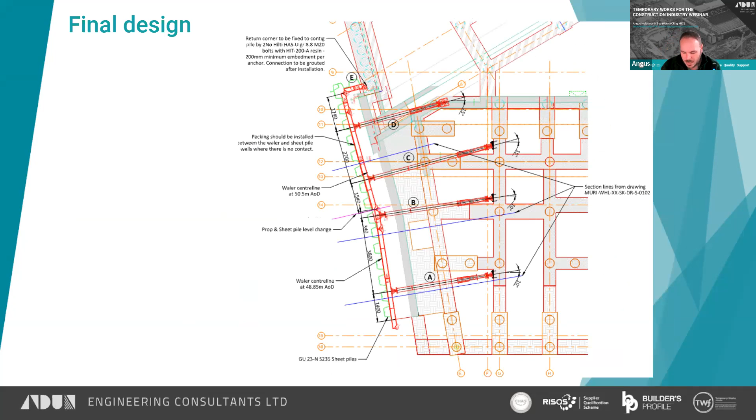Whereas if you come to us, you get the full solution, which covers the whole project, from installing those sheets, interfacing with the railway, to getting a solution that works at the end of it, but works holistically on the project, not just locally for one aspect. And there's the design in principle. We also used a return corner up here off the permanent works to prop that end. So wherever we can, we use things that are already going to be installed to make sure that the scheme is the best that it can be overall for a client.

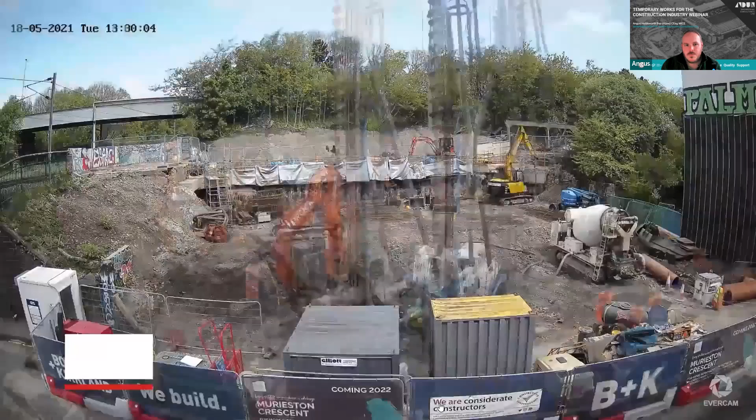There you go. And this is just a little video of that site being installed. This is Murieston going in. Yeah, it's quite a compact little site and quite a lot to be built in there. You can see the ground beams going in down there. Quite a difficult site to manage logistically, I would have thought. And there's the sheets gone in, propping going in.

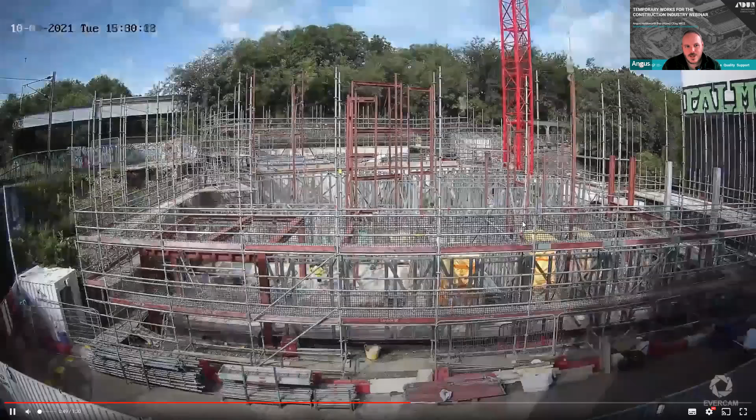Permanent works going in. And there you go, backfill, pull the sheets, job done. Well, you can see they really did use every available inch of that site to maximise the build for their client. That scheme is now finished. I think there might even be people in it now.

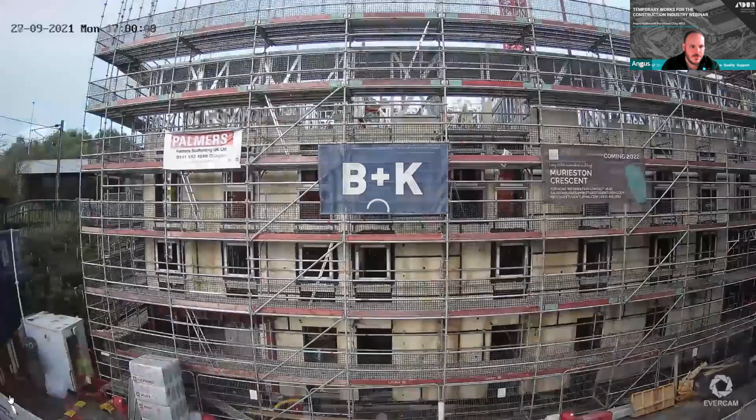Why can't I get out of this video now? Okay, right.